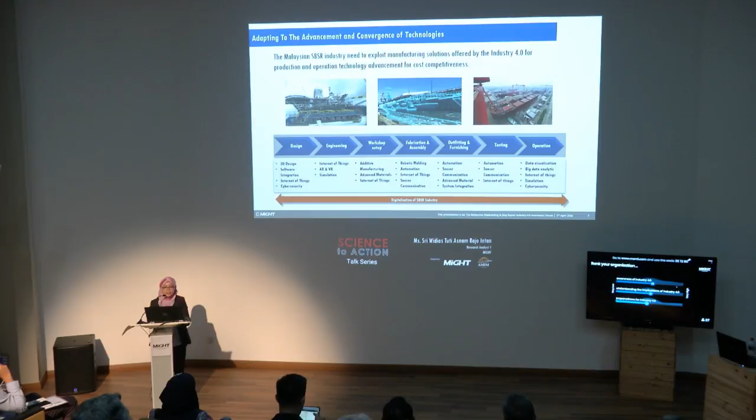Adapting to the advancement and convergence of technology, here we can see this supply chain of the SBSR industry, from design into operation, then elements of Industry 4.0 along the value chain. We can see here 3D design, software integration, AR, VR, simulation, and others. This is important for digitalization of the SBSR industry, and our Malaysian SBSR industry needs to exploit manufacturing solutions offered by Industry 4.0 for production and operation technology advancement for competitiveness.

Industry 4.0 in SBSR leading countries - our leading countries have already embarked into these technologies. For example, robotic welding systems in Norway and South Korea, digitalization of shipyards in Australia, virtual reality in Japan, 3D printing in Ulsan, Korea, system integration in Germany, IoT sensor communication and big data analytics in Germany and also in Korea.

Countries that have started to invest in technologies related to Industry 4.0 - looking from a patent registered perspective, this registration is from 2012 until 2017. The most invested countries are China, followed by Korea, US, UK and Japan. Both China and Korea's registrations are mainly for robotics technologies, followed by virtual reality.

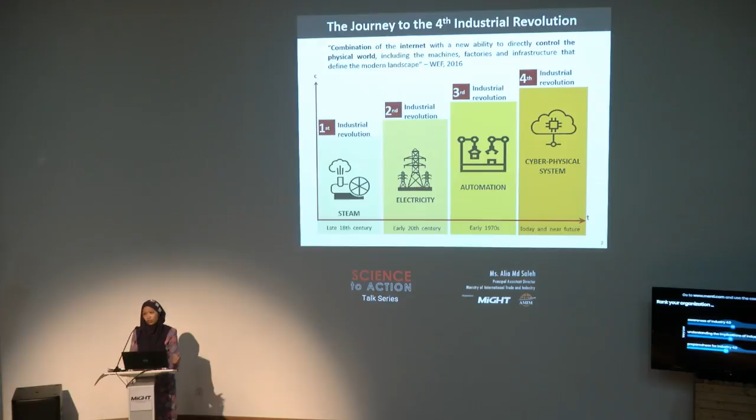So firstly, when MITI wanted to understand this whole concept of the fourth industrial revolution, as MIGHT rightly mentioned, the WEF propagated this concept as the combination of the internet with the new ability to directly control the physical world. So you can see where we are in terms of the cyber-physical system. That's how WEF described what the fourth industrial revolution looks like. I'm not going to go into detail on the first, second, and third revolutions, because I think industries will understand this on your own, and it could be academic to a certain extent.

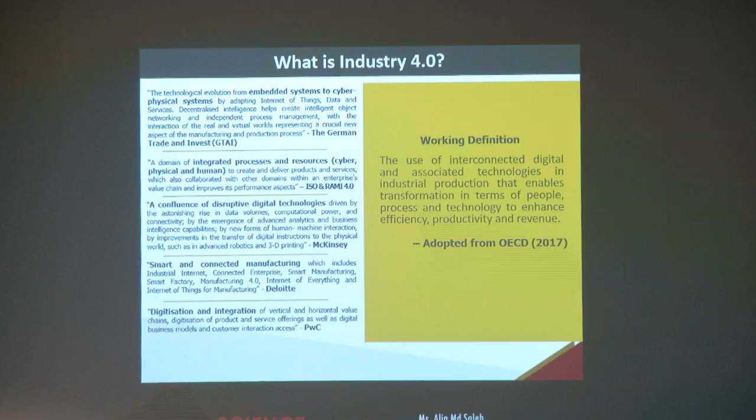So when we wanted to define Industry 4.0, we looked at how other people define it elsewhere. We have the Germans talking about embedded systems to cyber-physical systems. We have the ISO RAMI 4.0 talking about integrated processes and resources. McKinsey, Deloitte, PwC — the consultants out there — are also looking at providing specific solutions for Industry 4.0.

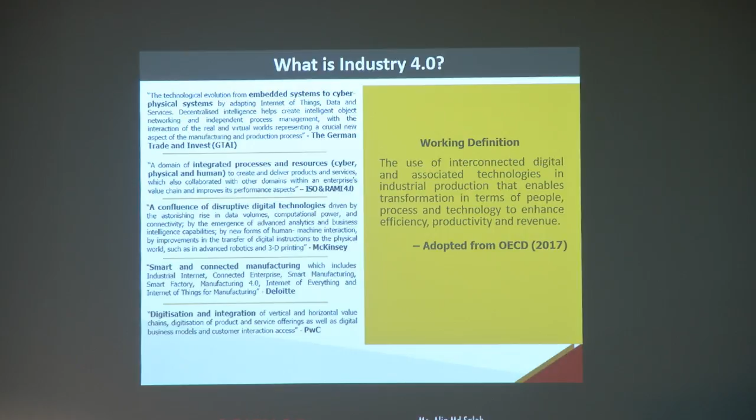So in terms of MITI's working definition, we're talking about the one adopted by the OECD definition: the use of interconnected digital and associated technologies in industrial production, which enables transformation in terms of people, process, and technology, to enhance efficiency, productivity, and ultimately revenue. So we're quite clear in MITI that when we talk about Industry 4.0, we're talking about how it applies to manufacturing-related services, and ultimately, to a certain extent, the services sector.

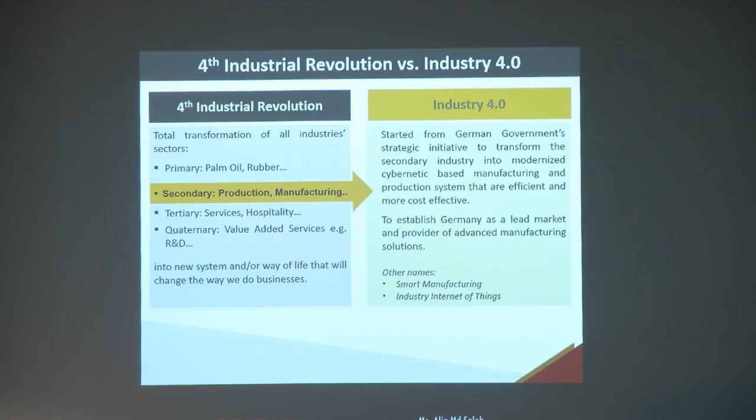Because Industry 4.0 itself is a term coined by the Germans' initiative. Other names you see out there — the United States use smart manufacturing, others use industrial Internet of Things. So what are the technologies driving Industry 4.0?

You've seen the first slide just now with some of the technologies, but these are the ones we're looking at as the basis for Industry 4.0: big data analytics (BDA), cybersecurity, augmented reality, additive manufacturing or 3D printing, systems integration, simulation, autonomous robots, cloud computing, as well as Internet of Things.

Now, if you combine all this together, we talk about having the future of manufacturing. But these are just the 9 technology pillars we have now, and some of these are actually not yet mature in terms of state-of-the-art technology. But there are other emerging technologies that are also covered by the policy framework.

What are the prospective benefits of Industry 4.0? When you adopt this new technology, it gives you higher flexibility, so now we're talking about customization. A manufacturing line needs to be flexible enough that you can produce low volume but high mix. In order to do that, you have to be flexible, and Industry 4.0 gives you that advantage. It also gives you the advantage of speed — higher speed from prototyping to mass production — using innovative technologies. You also optimize current processes, and this includes productivity.

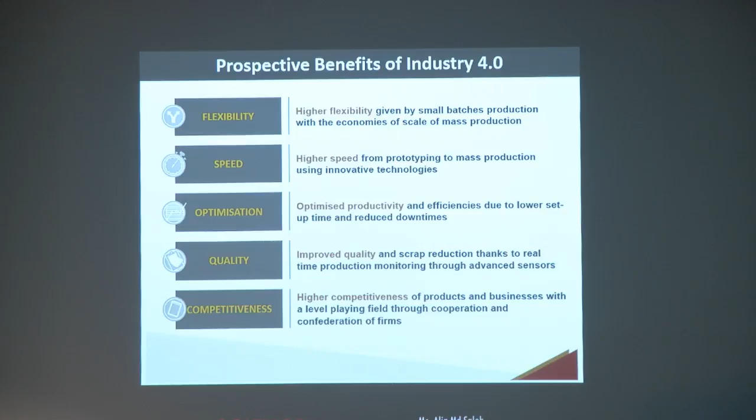You also talked about a higher increase in quality because now you can intervene in the whole processes real time. And ultimately, it gives you higher competitiveness.

So when we wanted to find out what were the key challenges, why aren't industries in Malaysia moving to Industry 4.0, first and foremost, we found out that not many people actually realize that this affects them. So in terms of awareness, that's one of the key challenges for Industry 4.0.

We also see that there are challenges in terms of best practices out there, and how do you share these best practices? Time and again, similar issues on skills and technology know-how would also be there. Digital readiness as well, because some of these, especially the SMEs, don't think there is a need to move to higher end. There's a very high cost investment needed for you to go to Industry 4.0, and not to mention, of course, the data and cybersecurity concerns, as well as collaboration and culture.

So these are the government updates, meaning what we've done so far. It was a whole year, so we've done quite a lot actually. Stakeholder engagement, we've engaged our own stakeholders in various aspects of the government. We initiated a high-level task force in Industry 4.0. We regularly update cabinet in terms of what are the progress of the National Industry 4.0 framework.

We also stocktake the various initiatives on Industry 4.0 that are already done. I'll give you an example, like MOSTI already has the IoT roadmap. We have Education 4.0 under higher education talking about Industry 4.0 as well.

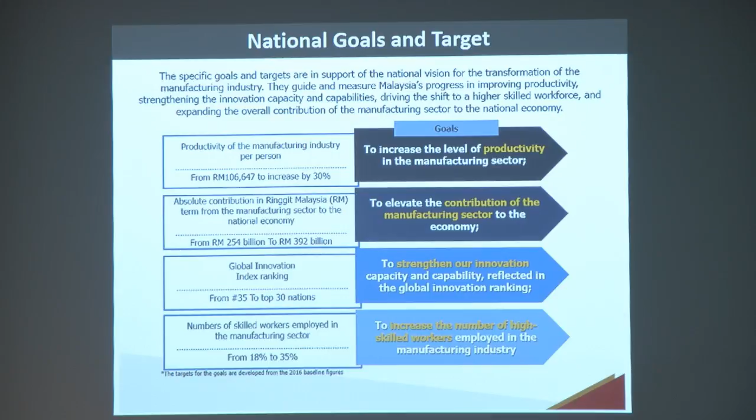So we have specific goals that we've identified in terms of productivity, that we're going to increase it by 30%. We're also looking at the contribution to move from 254 billion to 392 billion within the period of the policy. And we're looking at increasing our global innovation index ranking from 35 to 30 nations, and the number of skilled workers from 18% to 35%.

Now, the shift factors that we're talking about here is essentially the people, process, technology, because without these 3 components, you wouldn't have the Industry 4.0 seamlessly at the end of the day.

So we've coined the acronym FIRST, looking at where government could fit in as enablers. In terms of financing and outcome-based incentives, the first strategy would be to provide outcome-based incentives, including tax incentives, to encourage investments and adoption of Industry 4.0 technologies. Strategy F2 is to introduce dynamic and innovative financial products to encourage adoption of Industry 4.0 technologies and processes.

In terms of enabling ecosystem and efficient digital infrastructure, we're looking at strategy I1, which is to strengthen digital connectivity in and between industrial, education, and training hubs to remove connectivity bottlenecks, as well as for adoption of Industry 4.0 technologies. Strategy I2 is to enhance digitalization and integration of government processes and infrastructure along supply and manufacturing value chains.

And I3 would be to involve service providers for Industry 4.0 and link them to manufacturing firms to help implement technologies, processes, and skills development.

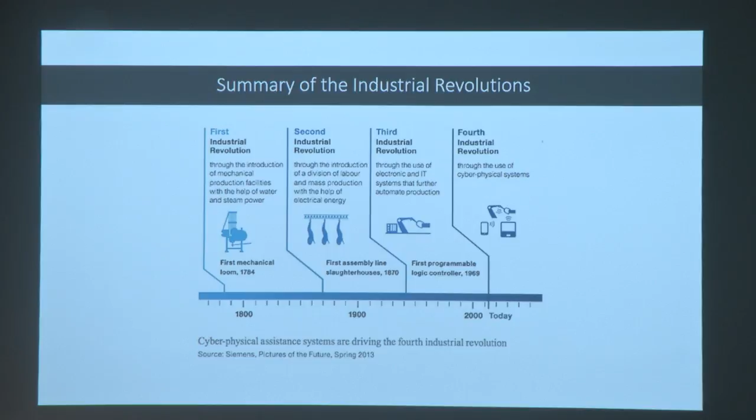So these are basically what happened in the Industrial Revolution. I'm going to link it with a story. If we take Industrial Revolution before the start of 1800, during that time people were doing lots of farming, there were many farmers there. And then when you ask people, what do you want to do when you grow up, the kids would say, okay, I want to be a farmer like my father.

This is due to the capability that has been unlocked by technology. So we say that if you have one farmer who can produce one unit of food, when the machine takes over, one farmer can produce 10 units of food. So what happened to the other 9 farmers? They needed to move to other sectors. Probably in this case we can see the services sector could absorb them, because all those machines need to be serviced.

So in this sense, I would like to echo back what Ms. Alia said: the key is to be flexible. We need to move from one sector to another, and try to have our students ready for what we're going to change in the future.

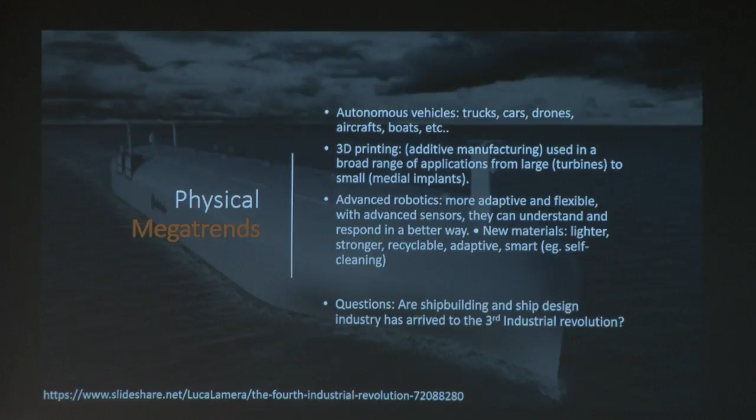So those are the questions that we need to address to make sure that industry becomes confident about what we are developing in university. So these are some of the trends that we're going to bridge between physical and digital. We know that Industrial Revolution 4.0 will take out the barriers between physical and digital.

When you say industrial, people keep talking about Internet of Things. Basically, the one that Mr. Nazri mentioned just now, the Internet of Things, probably it has been there for a long time.

Yes, indeed, because initially, classically, when we go to the bank to withdraw money, we go to the counter and we need to talk to the people, and then we take out the physical money. So one example of a classical Internet of Things is the ATM machine. It has been well connected throughout the world, throughout Malaysia.

So for us from the academic side, we try to get inspiration from the ATM machines. What if we take this autonomy, or the communication between devices, to be as robust as the ATM machine? There must be a solid regulation that controls the Internet of Things. That's something we need to comment on to the policymakers.

Nowadays, if you go anywhere, like McDonald's, you don't have to take out cash. You just tap your payWave card and the transaction is done. You get the food, but you didn't put out any physical money. So these are kinds of Internet of Things.

Later examples of Internet of Things are your cameras, the Wi-Fi cameras at home that transmit signals, transmitting images to your phone saying there is an intruder at your home, or people who are trying to monitor their babies at home without being there themselves.

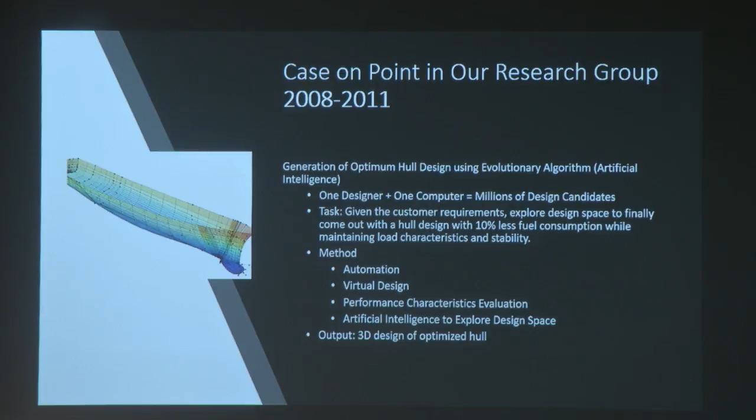So in 2008, when I tried to run this, it took about 2 weeks to create millions of design candidates. Nowadays, no longer - within a few hours we can create millions of design candidates. That's one of the blessings of increasing computational power.

Next, once I am satisfied with the system, I move to the physical part. So our group embarked on rapid prototyping because finally we want to arrive at the creation of autonomous vehicles. But remember, again, we are in a university - we don't have much funding to build a ship as huge as our RV Discovery. But we try to prove the concept using miniature vehicles.

So in this particular case study, 2012-2016, we try to move towards rapid prototyping: one designer, one 3D printer, and a couple of off-the-shelf parts. We want to create autonomous vehicles.

So phase one is to use rapid prototyping to model different models of quadcopters. This was in 2012. At that time, the quadcopter and drone community had just started to emerge themselves, due to the

democratization of systems. I believe everybody in this room has heard about open source. One of the best things about open source is we can use whatever people have published, and we just need to acknowledge them and then try to republish it while acknowledging who the first people were who wrote it.

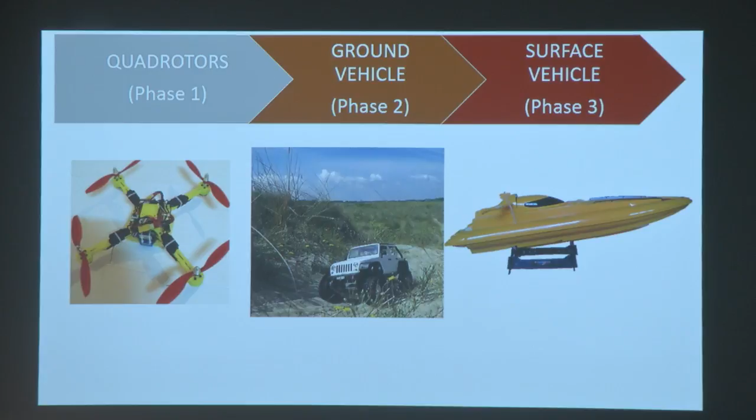I settled with the PID only. About two weeks ago, when I was convinced that the convolutional neural network, the visual-based neural network, is the future, I was going to push this autonomous vehicle not only limited to the PID, not only limited to the GPS, but to put a camera in front of the ship, and just tell the vehicle to move from a coordinate, and it will use the camera to move. If there is an obstacle, it tries to move itself. So less dependency on the sensors, and we create redundancy, which is a good thing. Redundancy is very important in autonomous vehicles.

So we have learned some lessons. Lesson one: truly autonomous vehicles, taking into account what happened during March last month. Truly autonomous vehicle technologies in marine vehicles are really in a baby stage. Nonetheless, now is the best time to invest effort to nurture these autonomous vehicles, because whoever pioneers it will create a snowball effect. I remember most of the seafarers in this room are mostly pioneers in shipbuilding, and I believe this is a minor part that I contribute to ship design and shipbuilding.

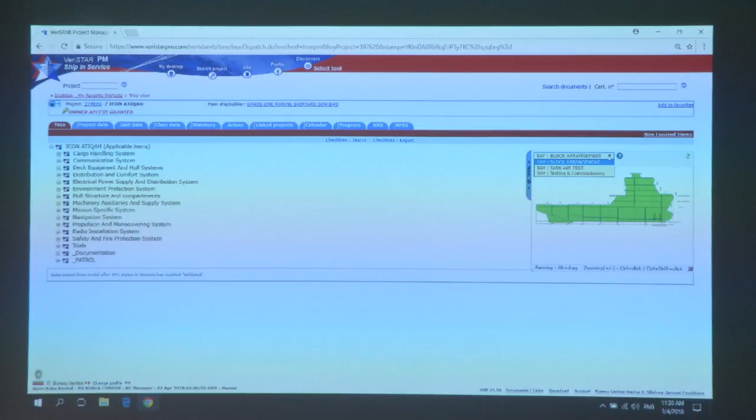What we call a tree is actually a list of items that is typical in new construction projects. We have a link with the GA that is being produced. At the moment, it is still being used manually because, as I said before, for each project it is created according to the actual project, according to the specific GA or typical for that particular vessel. So this is produced based on the actual ship.

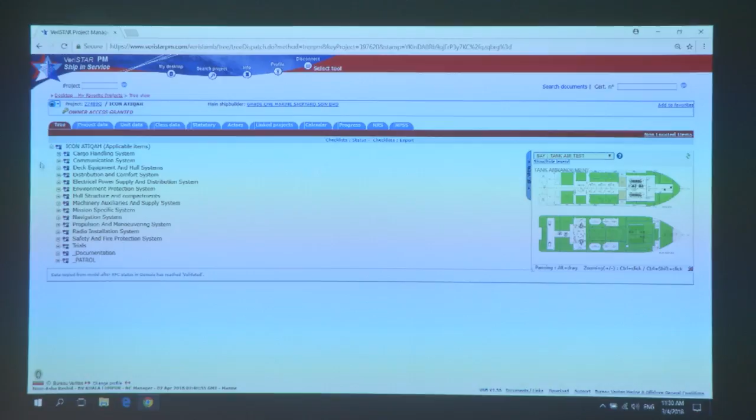So here we have this tree, where we can expand our activities and list of interventions for the surveyors. But at the same time, from the graphics that we have here, we can identify for each activity the link between this graphic and the tree. So here you can see the color, it is color coded, but for this project you can see only green because it's completed. It's like using the traffic light system: red, green, and yellow or amber.

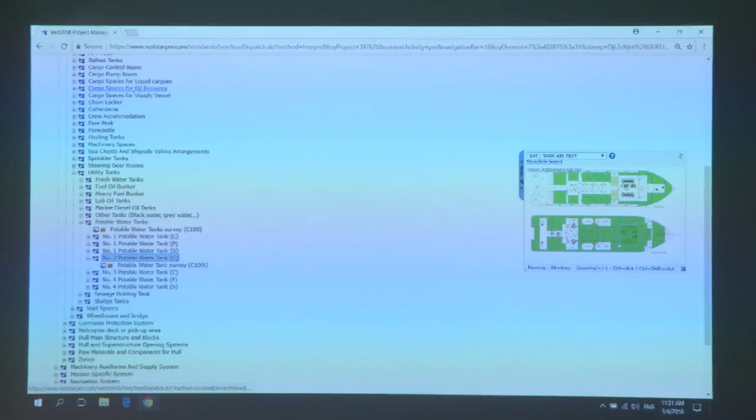So for each project we have identified a unique BV register number, the name of the vessel, and the shipbuilder. We have identification of all the ships of the relevant shipbuilder, and then using the tool, it is identified what are the specific rules and regulations for the vessel, what are the owners, and then we have class data which identifies the service notations or the type of vessel of the project.

Showing the service notation, the type of service, additional service notation, navigation notation, and so on.

And here it would identify if the vessel has a sister vessel with the same project. And we have a list here of what are the relevant statutory requirements for the vessel.

In here, what we call actor is actually those who are involved. For this project, for the BV context, it doesn't appear because for each completed project, those who were involved or were assigned for the project were revoked about 2 weeks after the vessel is delivered. The reason for this is for each project, each actor is appointed by the new construction manager, and only those who are involved or assigned for the project can have a look at this system.

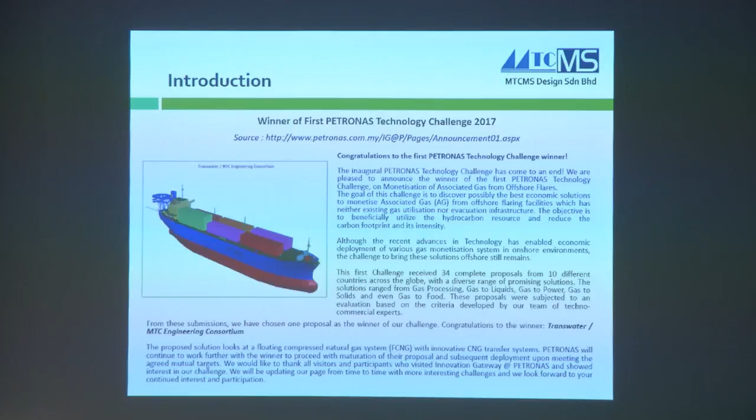Okay, this is what we do. We apply advanced design philosophy in our work using cutting-edge technology, and we desire to innovate, to be at the forefront. We have to be innovative.

And we're doing now, we are providing disruptive innovation. What I'm going to show you later on is actually disruptive innovation or solution, which is very hard to sell in the first place anyway. It's a challenge. And we provide solutions to the ship owner, to the industry player, from the beginning of the design until the end of the ship's life. This is the new approach in ship design.

Okay, this one maybe I put this before I heard the papers from the other speakers. Perhaps now these are all not relevant anymore. I think you got the answer.

But just to highlight what happened in the local market, we are about 15% according to my report. You have the report with you now, I think, each one of you. On the page, I can't remember the page number, in the early part it says 15% of the shipyards in Malaysia are at medium level of automation.

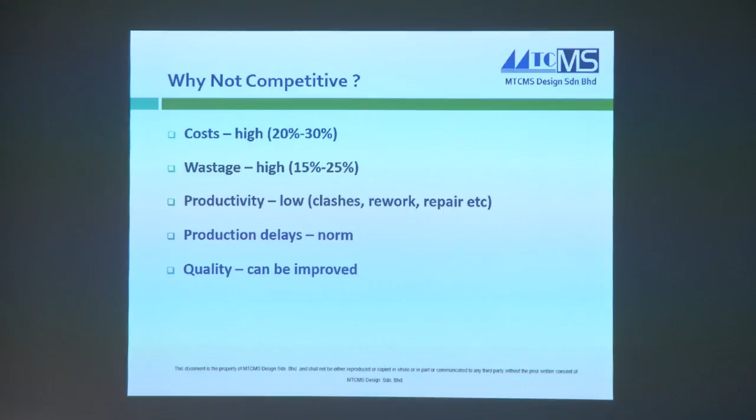Quality, of course, we can improve on that. So what I'm saying is, what if all that can be improved? Production time can be reduced by 50%. Instead of 2 years, we can do it in 1 year.

Quality improved, delivery time will be much earlier than what's specified in the contract, and overall cost saving about 20%. Don't you think we can beat China now?

So Industry 4 can provide this. I'm a strong believer in Industry 4 now, okay? And I hope all of you, when you get out from this meeting today, will become advocates of Industry 4 for SBSR in Malaysia. I hope.

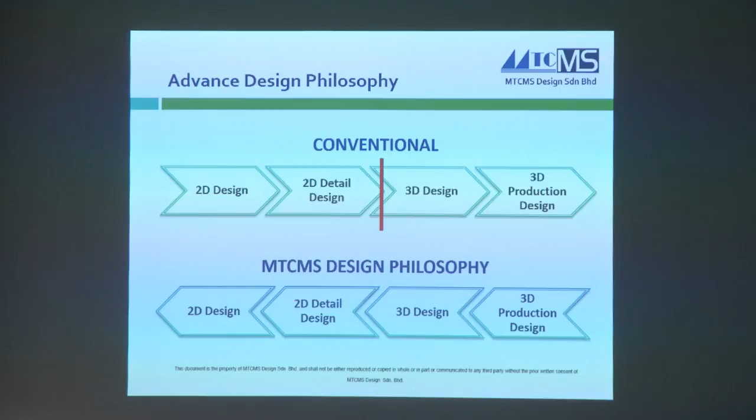Just understand about the process - now we reverse it. So when we reverse the process, we try to sell the idea to the industry player. It's hard to imagine, you cannot imagine because we are still in the old frame. It's quite a challenge there. Anyway, things are going to change soon, inshallah.

So when we say 3D, this is what we produce - the design. I think I skipped one slide earlier on, just about illustration, never mind, it's not important. So this is the production design that we do for a particular ship. Everything is inside there - all this color means a different system.

So we build the ship in the computer, in virtual reality. We are able to check whether the piping is going to clash with the electrical cable tray, with the structure, or not. It's all being done here at this stage. The steel hasn't been cut yet at the yard. We build the ship first here.

Any changes at this stage is at a minimum cost. For the moment, we offer this free of charge. It's part of the scope.

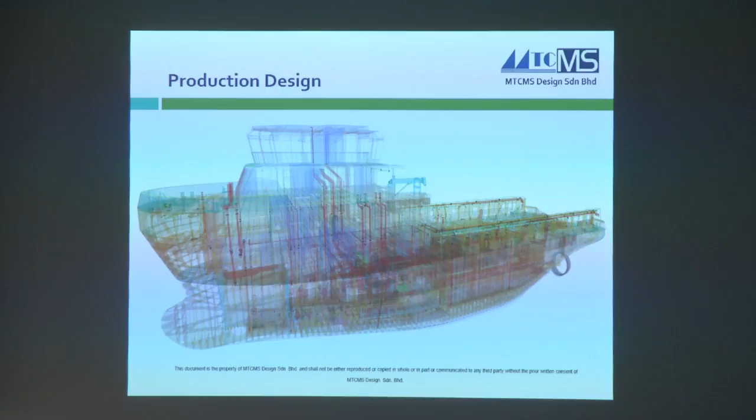I'm going to bring you the next slide to walk through. Sorry, too fast.

This is why we need high data, whatever, we need big data kind of thing, so that you can move very fast. It's a bit slow.

Just to show you, this is from an actual project, and the ship has been completed. This is what we do before the ship is built. We build the ship in the computer. We see what's inside the ship, the arrangement. This is an offshore anchor handling tug and support vessel, 61.82 meters. The ship is now ready in Sarawak.

Yeah, it's all homegrown effort by the team. You can see all the tanks for the supply vessel. You can see the arrangement for the engine room here and the accommodation here. You can see the structure, the arrangement.

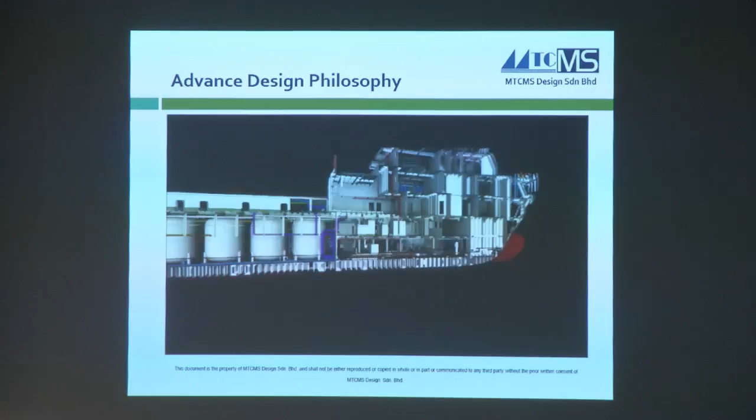When it comes to the structure, we use finite element analysis, another technology, to optimize the scantling, while still complying with class requirements. In one project, we managed to reduce the steel weight by 300 tons. Depends on the size of the ship, of course.

So you can see, for the ship owner, they can use this as training too. Even before they go on board, the crew can go through the ship by just looking at our virtual reality program.

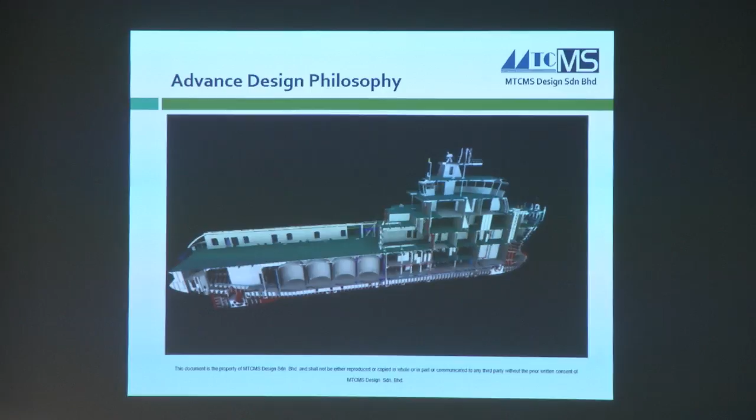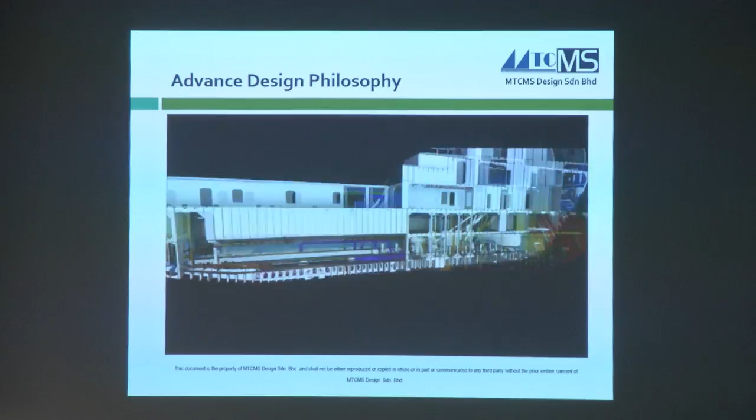So at this stage, if the owner is not happy with the arrangement, we can rearrange, because this is where we can incorporate the design for operation, not just design for production. If you don't like the arrangement, the owner or operator can say, okay, you want to rearrange.

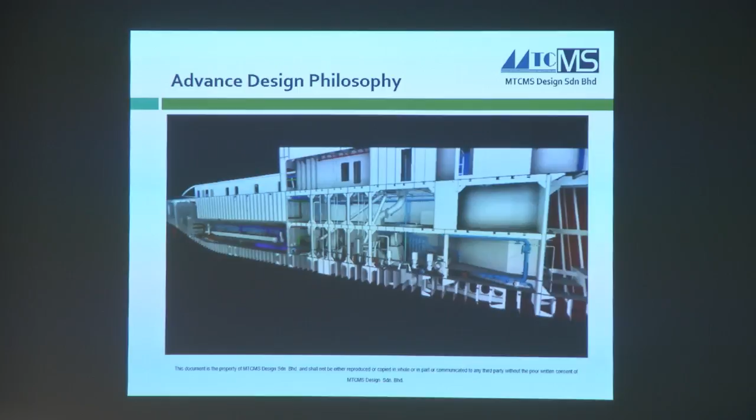So you can see everything, the piping, the equipment.

After this, we walk through the ship. So now the ship is completed. Mr. Owner, please come with me, we go on board your ship.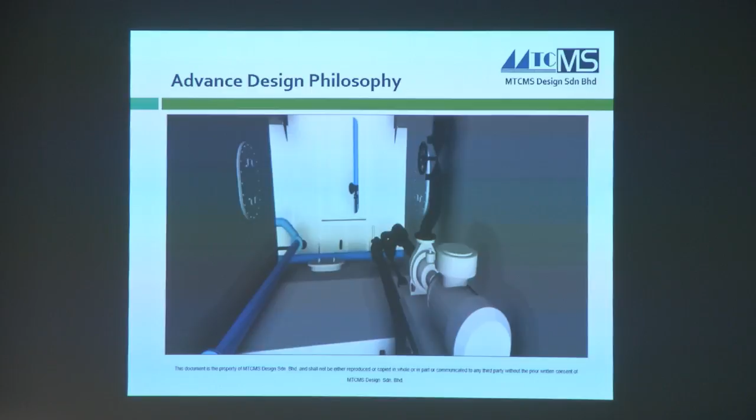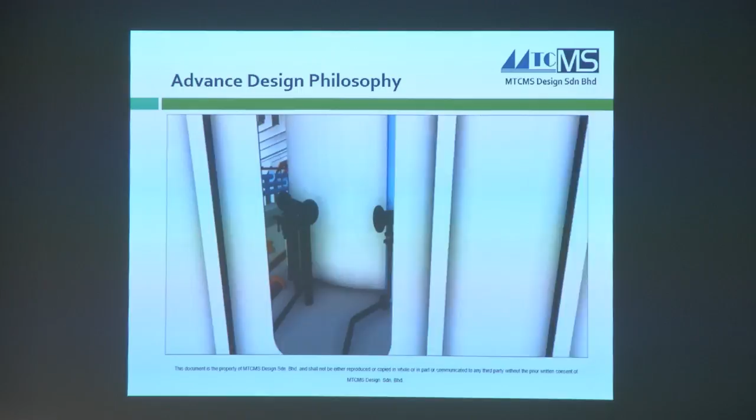And look, if you don't like the color, we change the color. For the piping, you can change the color according to the company's code. Labeling, all this can be done in virtual reality.

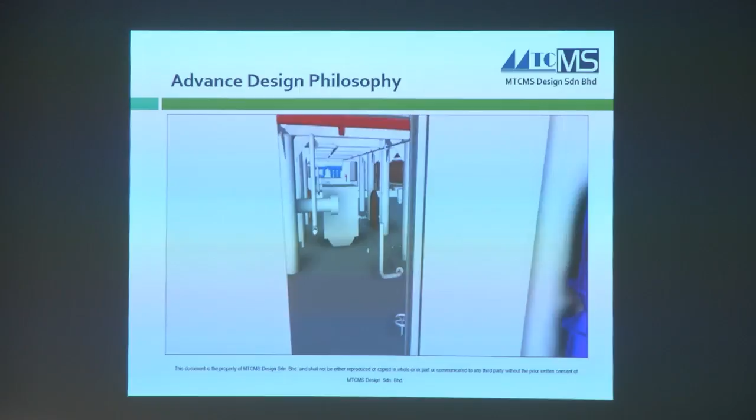So this is where the tank you saw earlier is. This vessel has about 15 piping systems, more than a normal ship, because of the cargo. We have to carry cement, brine, mud, for offshore operation. We can also fuel cargo for offshore supply, for offshore use.

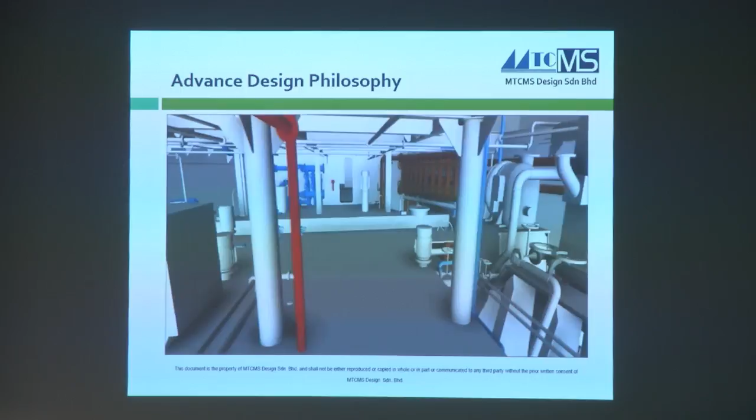So this is the arrangement in the engine room. Every equipment, every single item, is in the precise place. There's no room for error.

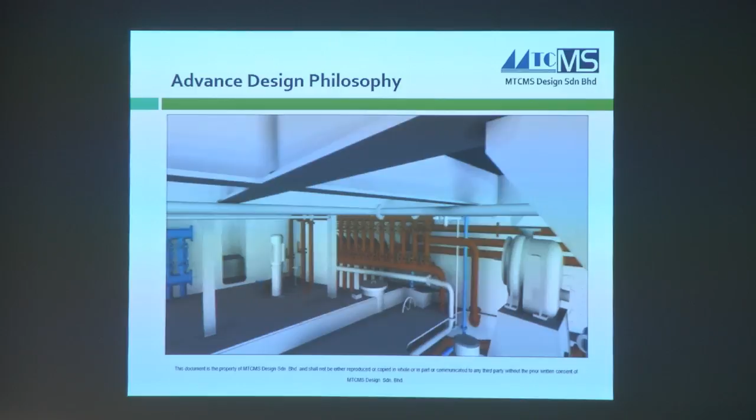Looking at the piping system in the engine room, we want to open up this platform, you can see the pipe. There's no way you can go easily, there's precision there. No clashing whatsoever. And I will show later, since the model is already completed, when it comes to construction, you can use what we call modular construction.

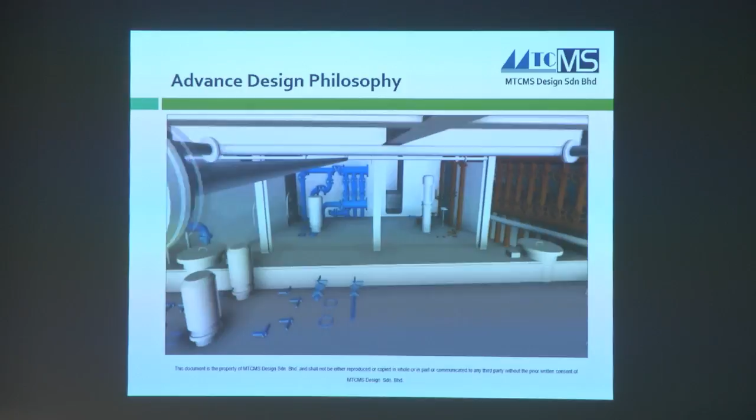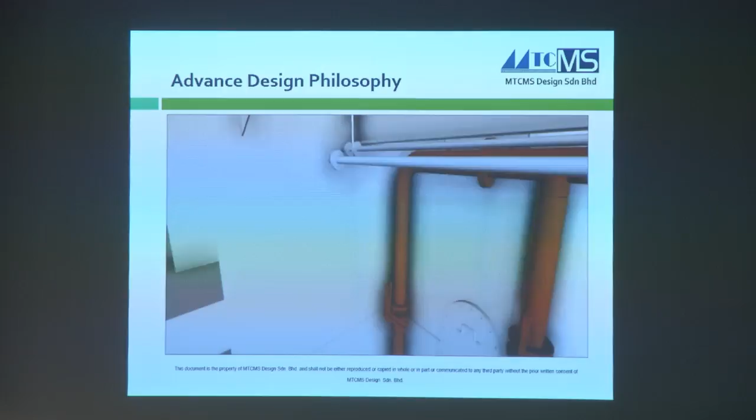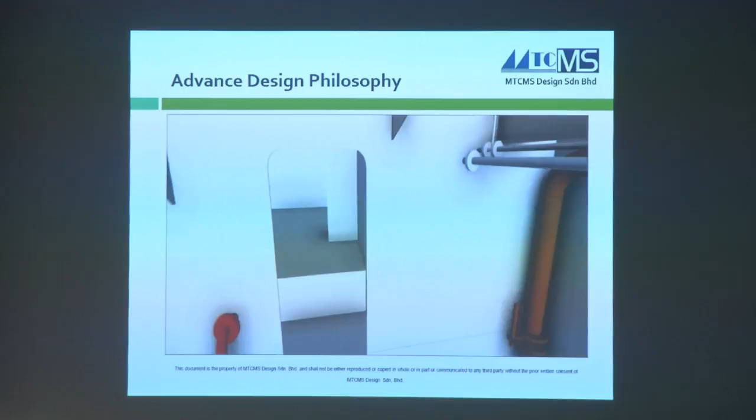You can see from here, the manhole here, whether it's blocked by the piping or not - it's not going to block. But with a 2D drawing, you have to imagine to match up the structural part and the piping. Very challenging. But now things are easy. Just like playing a game.

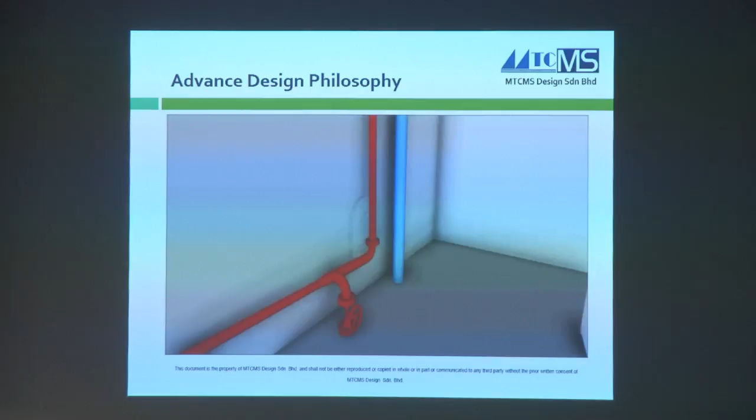As I was saying, you can do modular construction because everything is there. Modular construction has never been practiced in Malaysia - I stand to be corrected - never been practiced in Malaysia, even though I studied that 40 years ago. So that's how far ahead or behind time we are.

But with this technology, you are able to do modular construction, and because of that, the construction time can be reduced.

Next one is a bit challenging. Please help me.

Sorry. What I'm going to show next is the software that we use. This data is given to the ship owner and to the shipyard. It's interactive.

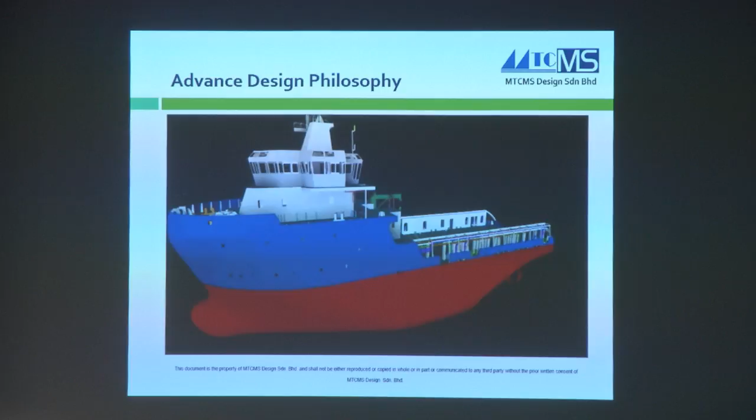What we are showing here, sharing with you, is a real application. It's no more a classroom matter. We are ahead in the real thing, not just research. I come from the industry, the group of people who use technology for our benefit.

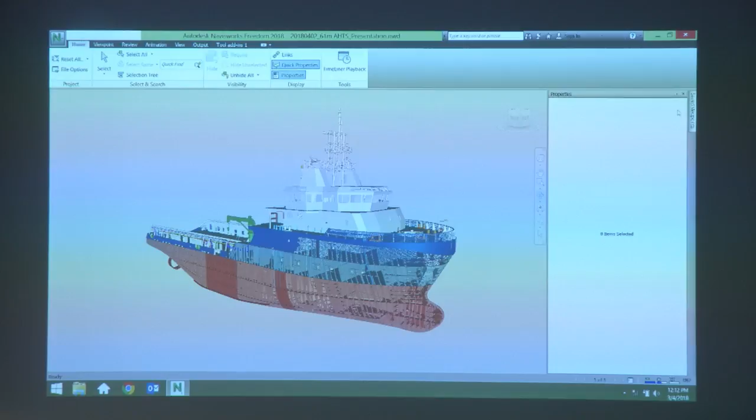As you can see here, we are going to select one item. This is the real ship, the one you saw earlier in the video. Now we are getting into the software where you can select one particular item, and you can see what comes out. Every item is at your fingertip. For the surveyor, perhaps you don't have to go on board, just use our system. Then you can survey from here with real-time reporting. I don't know, I'm just imagining things.

So this one, the pipe, you have pipe there. You select this pipe and see what comes out, the data for the pipe. When it comes to maintenance in the life of the ship, you have to do certain repair and maintenance. All you got to do is identify which one here, and you know what comes out. You can prefab that one before the vessel comes to the yard for replacement.

Oh, sorry. I never knew that I'm being recorded. So now I know, that's why they wanted me to speak here. So just now that part was censored, yeah? Okay, that one censored earlier. Okay, I think that's enough.

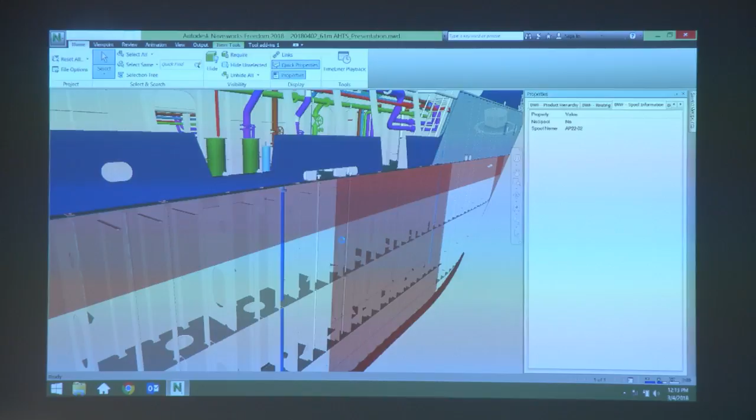We show this because I don't want the MC to remind me, 'you got 5 minutes.' I promised you just now 3 hours, right? So 5 minutes is a bit too short for me. Okay, this is what we see now.

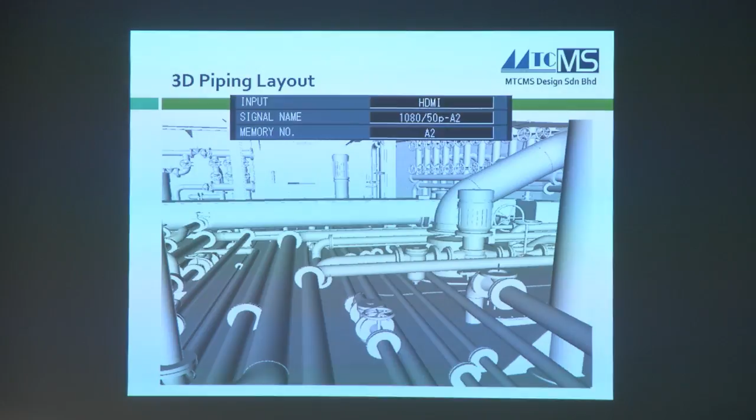Continue with the slide, example of the piping, 3D piping layout. A lot of piping there. And this is an example of the 2D drawing, where we used to see. And from the 3D, we can produce this.

We reverse the process, from 3D to 2D. Just look at this, the details, the angle, inclination. Before this, in the past, we didn't have this, so whoever read the drawing had to imagine how it looked like. Now no need, we can show you. You get precise construction.

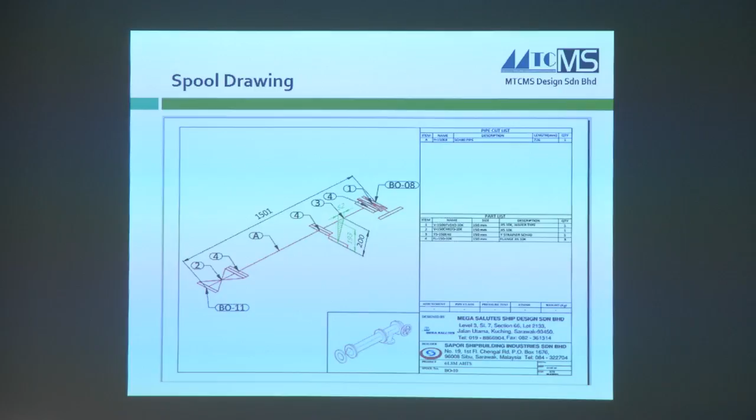But what we are seeing now with 3D virtual reality technology, whatever is contained in this block can be pre-fitted, modular, like what Samsung is doing. I was fortunate to be in Korea, Samsung shipyard, about 15 years ago. I said wow, this is what I've been looking for. The prefab or modular construction is complete for each block, everything in, even the propeller for the engine block. All they do is join at the later stage in the dry dock, just the block join and connection. It's an eye-opener, I think we can still go to Samsung and visit them to see how they do it.

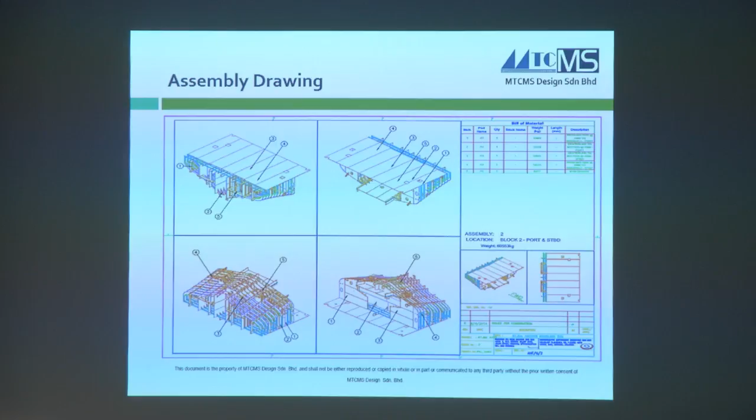So the same here, this will shorten the production. Quality is ensured because we use 3D model, 3D design. We don't compromise on quality.

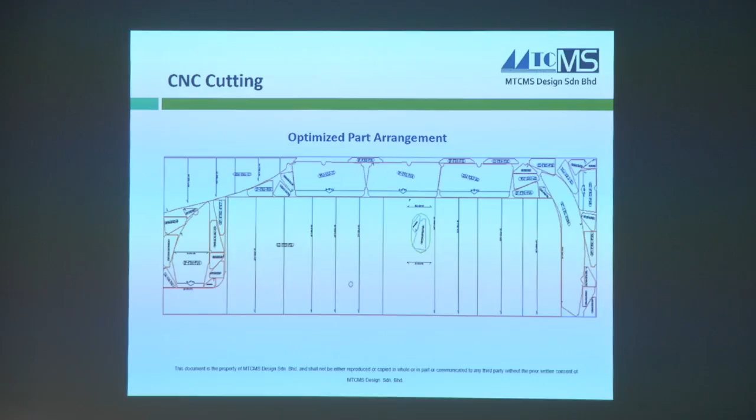And talking about CNC cutting, this is what we have. But pay attention to the word optimize. Just now Dr. Faisal mentioned that one computer can do millions of designs. So we use algorithm also to arrange the plate to make sure that wastage is kept to the minimum. That's why we can reduce wastage from 15% to only 6%, so there's cost saving there.

Yeah, this is what we want to offer, even extra from the traditional design: an inventory database to the ship owner. So everything is prepared for them. No need to wait for the vessel to be completed, we can do it before the ship is being built.

So with this, maintenance will be much easier. All the items given are listed, and of course when you select an item, you will get the details of what that particular item is for.

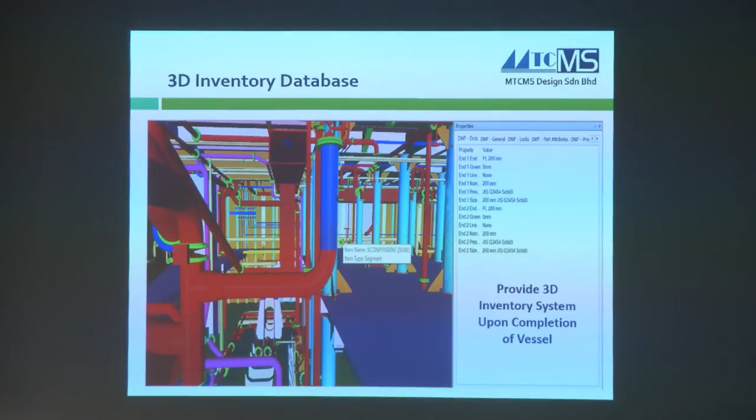The proven outcomes from using virtual reality technology in ship design and construction are these: reduce production time, reduce material wastage, increase productivity, better management system with the software and information, ease of maintenance.

I showed you about the inventory just now. Improved quality, because quality now is being built into the system. No clashing of systems, no need to repair, no need to modify. So what does that mean? It means quality is improved, and we get an optimized design, using finite element for scantling and exceptional performance.

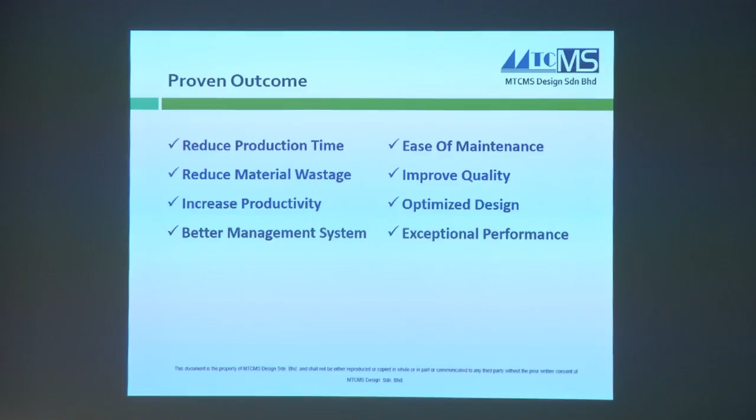I'll show you later on also some technology that we use in the design process. So what we offer here... okay, all right, this is what we offer now.

In our case, of course, we can offer this, and most important is in our design we give this inventory system, the inventory database for hull, machinery, piping, all on board. That's the main difference from the 2D, as far as our deliverable, besides the drawing.

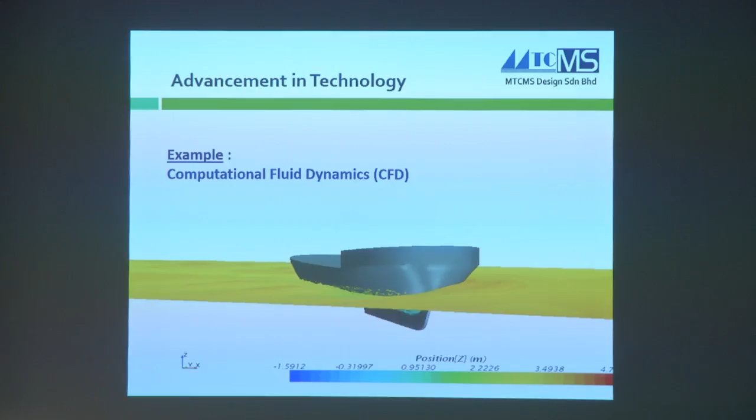This is some tool that we use in coming up with the design. In this case, they're using CFD, computational fluid dynamics, where we can evaluate the performance of the hull form, and then we can optimize.

Just now the professor mentioned about optimizing the design — I think around 10% fuel saving while maintaining the payload and the stability. You can reduce your fuel consumption by optimizing the hull form and the propulsion system, the propeller and so on. So we do this in our design.

In a way, I want to highlight this point — it will change the way government contracts call for tender. Nowadays when you open up a tender document, it says the hull must be proven. Proven hull. In our case, this is how we prove our hull.

The speed can be achieved because we use technology — computer, tools, software, wide database, powerful computer. The CFD now, we need to have a supercomputer. I don't know, UMT, do you have a supercomputer?

No, we don't have one. But in Cyberjaya, one company has a supercomputer to do this kind of analysis, so we are talking to them for that purpose.

Of course, we have powerful visualization using this technology, and what's more, the result is accurate and the analysis can be very detailed. We would like to propose using a virtual towing tank instead of just the physical towing tank. UMT, take note, maybe you have budget for that.

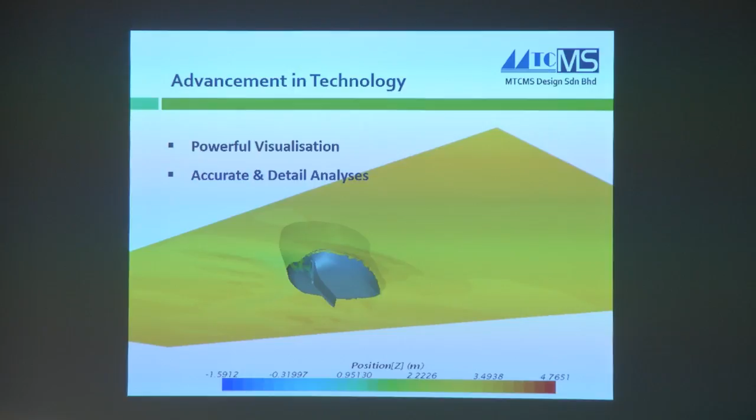Another one, another video — I can see some people starting to sleep already. Sorry, Teresa, do you have another 5 minutes? Oh dear, I thought I could manage to avoid that reminder, but I cannot.

Okay, never mind. So this is to show you what we call the simulation that we do — one of the designs we're working on, sea state 3 simulation.

Sea state 3 is talking about wave height up to 1.25 meters — that's how the sea state is classified, they divide all these states. And this is at a speed of 12 knots. You can see the performance of the vessel. So even before the vessel is completed, we know what the performance is going to be like.

Agak-agak mabuk tak? I don't think so, kot. Okay.

So we stop this one. I think I have a problem.

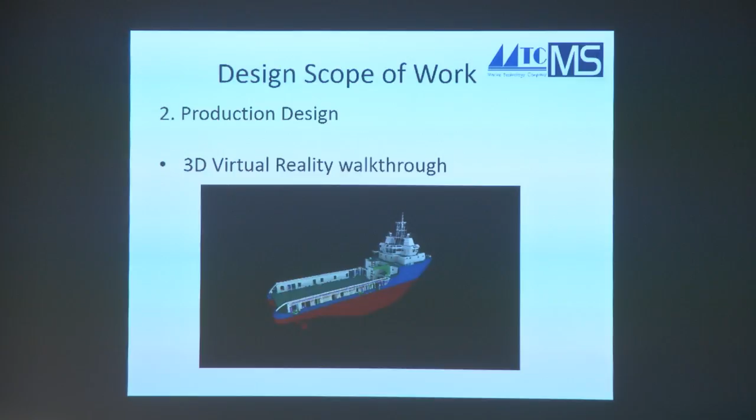Why do I go back there? I think I got a problem here. It's got confused now. How do I go back? Sorry, Mr. MC, I cannot go out now. I'm lost in the virtual world.

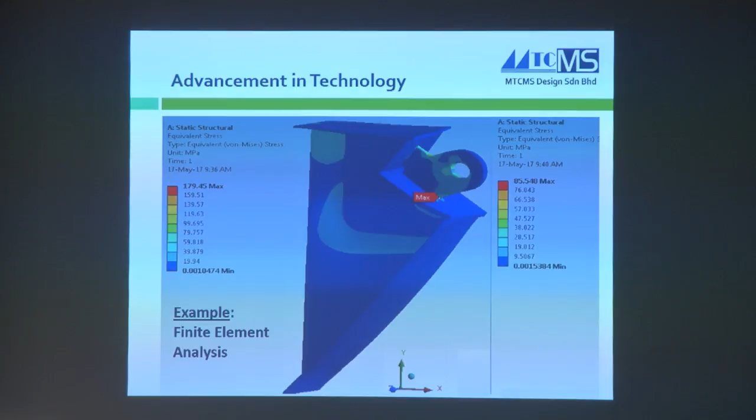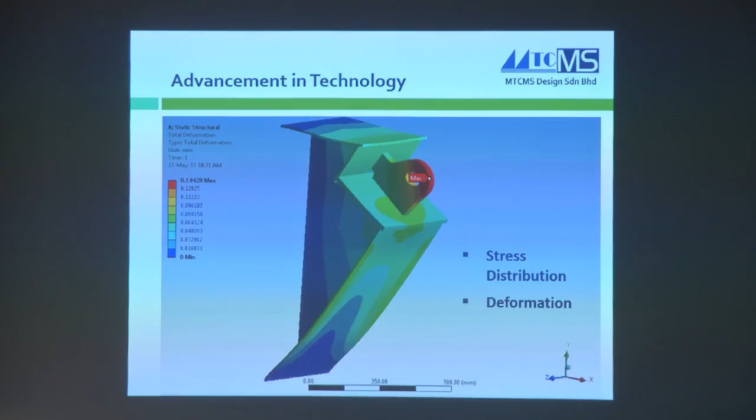Okay, maybe here. So this is an example of the finite element analysis that we do for some of the structure. Here we can analyze the stress distribution and deformation and so on and so forth. It's quite common for the past maybe 20 years or so, nothing new.

So what we are seeing now, local companies are able to offer world-class ship design and shipbuilding capability, and it is the way forward for Industry 4.0. We would like to be part of that enabler, that player that can help make the local industry more competitive.

This is the solution, Industry 4.0. I don't see any other solution. To be honest with you, one more minute.

To be honest with you, since I was involved in the industry for the past 10 years or so, whenever we have a forum, people will say, let's make the government make a policy, a rule, that all local owners must build locally. You can ask Mr. Anwar, you can ask everybody here. This is always the common thing.

And the owner said, how can we build locally when the price is so expensive? And I said to myself, yeah, we cannot be cruel to the ship owner just because we want to protect one industry. So I had no answer. But today I have the answer: Industry 4.0. That's the way forward.

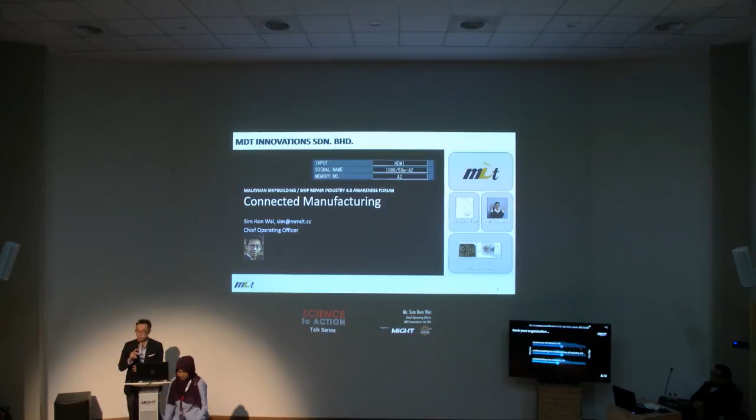Good afternoon, distinguished guests, ladies and gentlemen. My name is Sim Hon Wai from MDT Innovations. Unfortunately, I'm standing between you and your lunch, trying to make it sweet and short, as sweet as candy, as short as a miniskirt.

So I'm coming from a company that focuses on IoT. I think this has been a much talked about topic earlier this morning, and I'm also humbled by some of the previous speakers about the content they have shared. Very interesting and very enlightening.

I wouldn't want to go into detail about what Industry 4.0 is like, probably it has been much talked about by earlier presenters. But I think I'm also obliged to describe a little bit about where we're coming from, what my company is doing, so that you are aware of the capability and also the past records that we have.

So like I said earlier, we call ourselves an IoT enabler, the fact that we always believe in the philosophy of trying to connect things, trying to convert analog behavior into digital. So we are coming from an embedded solution perspective, whereby we make hardware, we embed sensors, we turn sensors and sense analog environment into digital data, and we build solutions and services on top of it.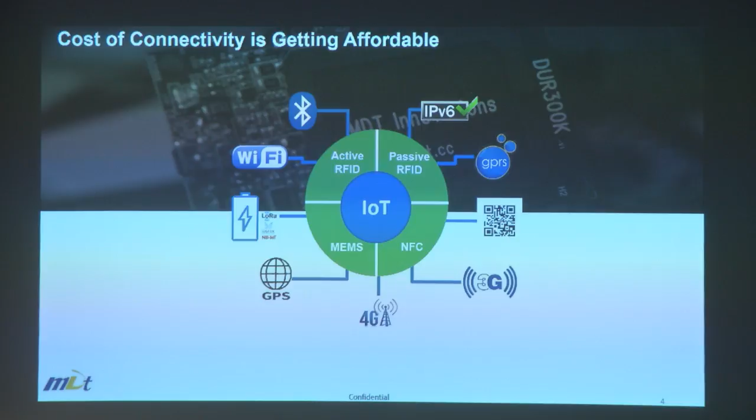So what will be the stumbling block for IoT? The next thing is probably how you can actually implement the right technology, the right devices, in order to turn your analog behavior into digital. Hence, in connecting manufacturing, we always talk about how IoT will be able to help, and how Industry 4.0 will be much talked about.

We'll be able to actually do M2M health checks. You look at this graph, machine-to-machine talking — I think George Lucas has shown us it's possible, like when R2-D2 talks to C-3PO, also machine-to-machine. Of course, now we come to the actual world — you can actually connect machine to machine by sharing information in order to better understand how you should promote or enhance your efficiency.

Not only the machines, you have to look into workplace safety, because human resources are your assets. Things as simple as WMS, fleet management, JIT, material supply chain, work in progress, automation - these are things possible and already being done by a lot of people, not only overseas. I'm seeing a lot of Malaysian private companies actually investing into technology, into IoT, into Industry 4.0.

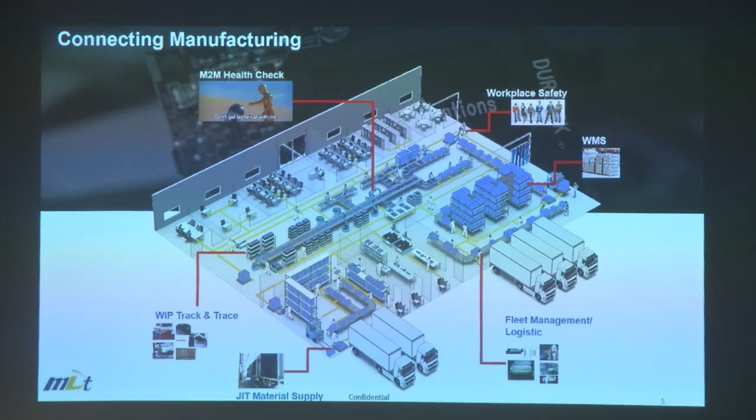So there are a few case studies that I'll be able to share with you, showing how we make things connected.

In every operation, you will have fundamental issues whereby things are very legacy - you have machines and systems that are not very connected. That's the one thing we come from. If you have a legacy machine, you cannot make your machine smarter. So that is how we come in.

We always give a consultative approach to see what kind of sensors we can embed to understand how your machine works. For example, with CNC machines that cut metal or plastic parts, we look at whether it's operating at the right temperature, cutting at the right angle, what acceleration the arms create when they move, and the gyro tilt it produces. These are things we can bolt sensors onto to understand.

With that, maintenance of your machines can be predicted - for example, if the arm has been moved vigorously beyond the specification produced by the manufacturer, you can predict this will be down or need repair in 3 months down the road. So it's as simple as that.

With factories changing from analog behavior into digital, you begin to look into analysis. You'll be able to understand the condition of machines, the movement of people - whether you have a factory running with a few thousand people or even hundreds, you'll know where they are. You'll also know the environmental condition of the factory, whether it's hazardous or not conducive for workers, which eventually creates costs in terms of insurance and injury costs. These are part of IoT and Industry 4.0.

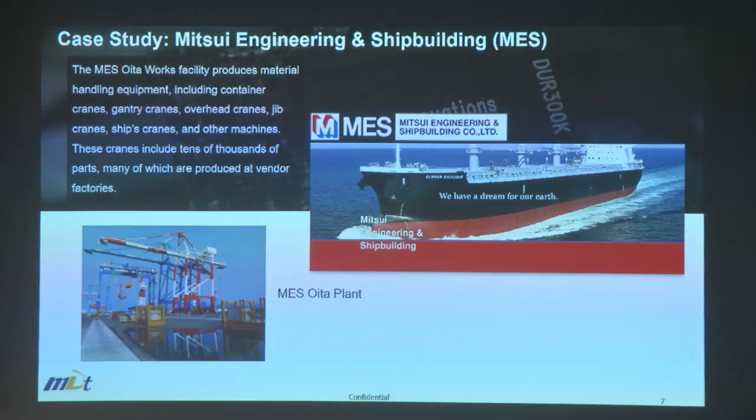What happened is they have this issue whereby one big crane, or any simple big crane, will have about 55,000 components. So it's very difficult for them to manage components from different vendors. When the components come, they need to sort them out, identify the counts, and identify if the parts are correct - it's a very manual-based task. Especially with Japanese labor wages, it's very expensive to get them to count manually.

So now, after consulting us and several other IoT companies, solutions are supplied by MDT and also a company called Zerafy - we are the two companies supplying solutions for them. Now they instruct their vendors: whatever parts you send to me at Oita Works, you have to protect it with RFID. It's as simple as that.

Each vendor will receive a new order sheet and corresponding RFID. So when they send the item, it will come equipped with RFID already, and without any problem they'll be able to identify it. What happened is they achieved timely delivery.

They achieve component efficiency, of course things are protected. And somehow they get into IoTization, because now they are collecting data they have never seen before once parts are being received.

So this is one of the case studies, as simple as that, because you are enhancing visibility. For example, as a boss, you want to know what is happening around the plant, whether workers are working, whether your goods are shipping out, whether your fleets are actually delivering the products. As simple as that.

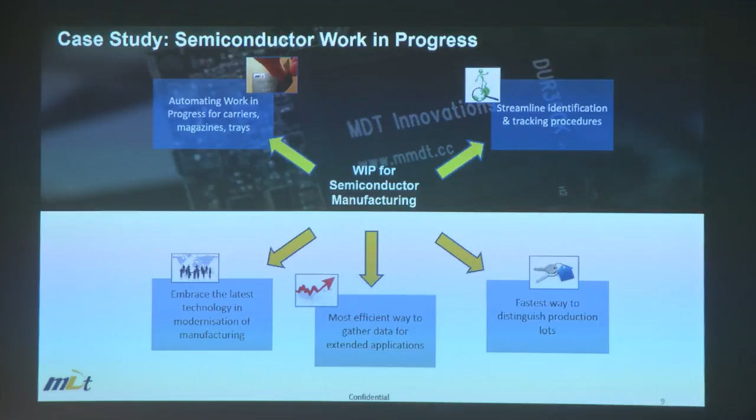What happened is we try to automate, and like I said, they have a lot of legacy machines. We make their legacy machines smarter in a way by shoehorning some parts and some devices. This is one of the areas why we look into wire bond machines in semiconductor firms, wafer saw machines, surface mount machines, and die bond machines.

If some of you who do not come from a semicon background, this may be alien for you, but it's all about how you fit in raw material, and raw material creates the product, the finished product.

With the implementation that we have provided, we are now able to see the status, the movement, the aging, the condition, the inputs and outputs, and the revolutions per cycle for the machines, and also data of raw materials and finished products. So these are the things that we look into.

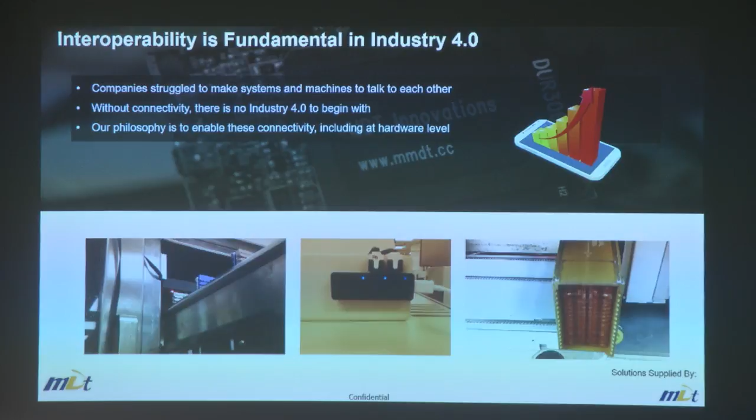Like I say, we've done the Malaysian plant, and now we are doing the Tianjin plant in China, and also the Bangkok plant in Thailand.

Next, besides the semiconductor case studies, also important for Industry 4.0, you look into OSHA, occupational health and safety. So again, we have sensors and solutions to look into wireless sensors to monitor fixtures, wireless sensors to monitor workers' health status.

You can probably create a command control center to determine what happened within your operation, within your plant, and probably predict maintenance, repair, and etc.

One of the things that we have overlooked, and probably the first world countries or even advanced countries, talking about Europeans, Australians, probably Americans, they like to look into this far more than Malaysians. Malaysians probably we overlook this.

This is what we call workers monitoring for OSHA. So it's not really about infringement of privacy when you track and trace where your workers go. It's also about safety and health check.

There are statistics even published by Malaysia, occupational diseases like noise-induced hearing loss in factories which are very noisy. You have hearing loss, and musculoskeletal disorders. These are the common injuries, and injuries can cause burden to healthcare, to our own MOH healthcare, and also probably to the company insurance as well.

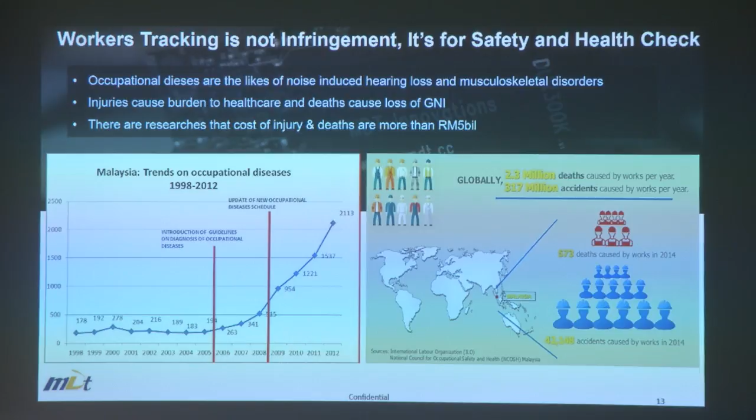So what are the things that we can actually look into or offer for workers' health and safety check? It's as simple as workers wearing a wearable. The wearable will be able to detect...

...their heartbeat, their SpO2, the oxygen in blood, whether they are fatigued or not fatigued, and where they have been within the scope of operation.

So these are the things that we look into. Of course, it can be a little bit basic, not too advanced. It can be as simple as sewing an RFID tag to the uniform, and when you walk in and out of the doorway, it will be detected. So at least you know where they are. At the end of the day, when you do a roll call, if a fire breaks out or a disaster occurs, or the building collapses, you're able to identify whether all the people are accounted for, rather than not knowing how many people are still inside the building. So these are the things that we look into.

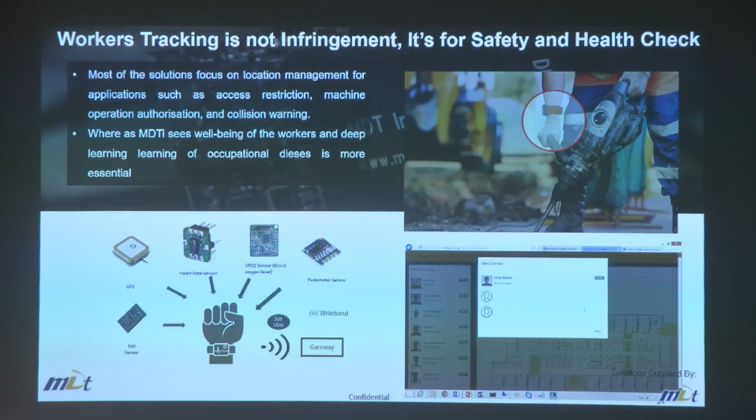So, of course, talking about people, it's also important to talk about the fixtures, because there are occurrences whereby the fixture will be... let me see if I can show this. Oh, media not found. Anyway, I wanted to show you a video where a forklift driver banged into the rack, and then the rack collapsed, causing a chain reaction, and the whole entire warehouse collapsed. So this is one example of why it's important to monitor your fixtures, because fixtures can be hazardous to a human being.

Your fixture issue may not only be about the integrity of the impact, whether it will sustain a certain accident. It could be as simple as the air quality in your environment. If, let's say, it's too poisonous or too dusty, it will create respiratory issues for your workers. So these are the things you can implement sensors for, to help you understand your work environment better.

So again, this is one of the so-called tracking solutions for a rack solution, which we implemented in Sydney many years ago, to counter the kind of accident that happened. So when a forklift driver bangs into the rack, we can measure the G-force, whether it's half a G, 0.8 G, or 1 G. Anything 0.8 G and above, you need to actually repair the rack, otherwise it will cause a collapse.

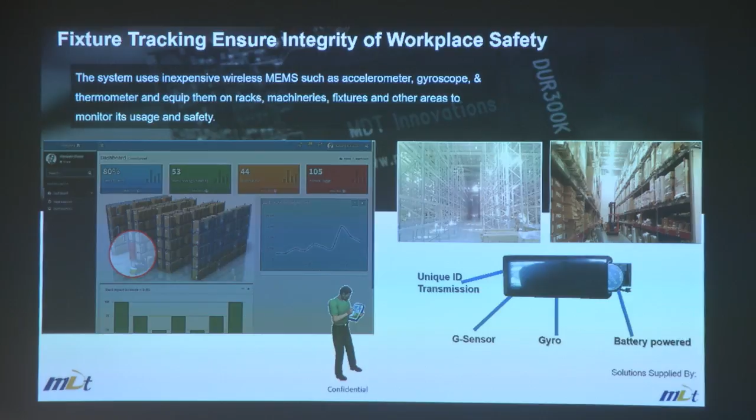Of course, those are the three or four case studies that I have experienced before, because we do implement those kinds of solutions. But I just want to share with you that there are more success stories and benefits of connected factories. So these are some of the summaries.

So one of them is probably looking into a solar farm, a simple solar farm. A solar farm produces electricity and feeds it into the grid as AC current. So when you talk about production of energy, you always look into the productivity of the solar panel, the productivity of the inverter, and also the energy loss when you convert DC power, which is traditionally what you harvest from solar, into AC, which is what's actually used by the grid itself. So these are the losses that you don't know about in the beginning.

But now, with technologies in place, there's something we call a smart inverter that can detect which panel is not working. It could be as simple as bird poo covering it, or it's dirty with dust, and you just have to clean it up. Or perhaps the cell itself, the solar panel itself, is malfunctioning, and you have to replace it. So there are statistics showing that by having connected PV cells, you're able to increase productivity.

Looking at the bottom statistics, this is the covered module with cloud: with 83%, you can increase to 97%. Broken module goes from 66% to 94%, and so on. Broken module means the solar panel is not working. So we're able to streamline and boost up the DC power when necessary. This is one of the solutions that can be, and has been, implemented.

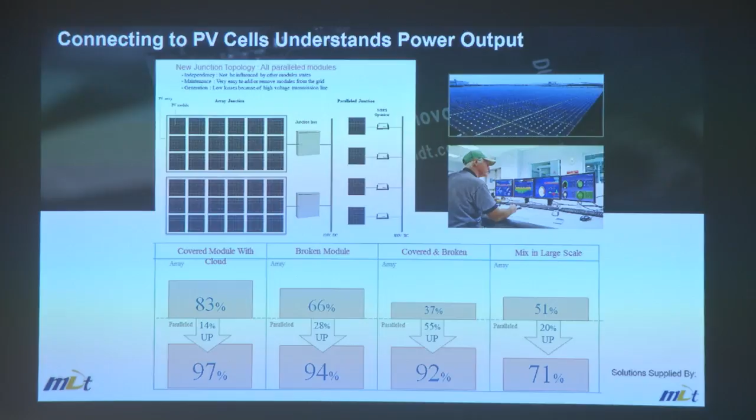And then one of the Korean companies, a pharmaceutical company called Hanmi, implemented a very simple RFID tracking and tracing system for inventory, and it was immensely successful for them in reducing loss, and also for instilling first-in, first-out, especially when talking about pharmaceutical products. It's important to implement this rule—you don't want your old stock sitting in your warehouse until it expires and you have to discard it.

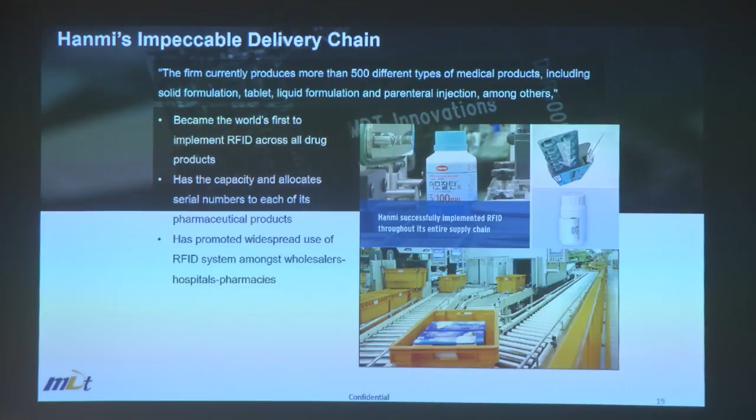Hanmi has received much talk about articles and publications by RFID Journal. One of the Italian steel pipe makers has also implemented active RFID tracking for raw materials for steel pipes. This is a very successful and immensely popular case study that factories have looked into for IoT, RFID, or even SCADA systems being modernized into IoT to understand more of what is happening within your operation.

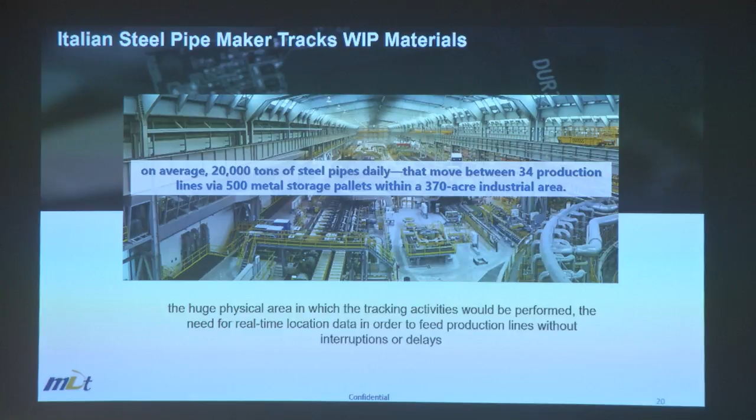Having said that, I also read on the screen down there that the preparedness for Industry 4.0 is 2.9, I think out of 5 on the scale. So at least we are more than 50% past.

So what my point and my stand is, we just don't have to talk about IoT, we implement it, because the cost of connectivity is so low. And if you don't start somewhere, if you don't plan for the day after tomorrow, you will be doomed. That is what happened to Nokia, Kodak, and a lot of companies which always get much talk about.